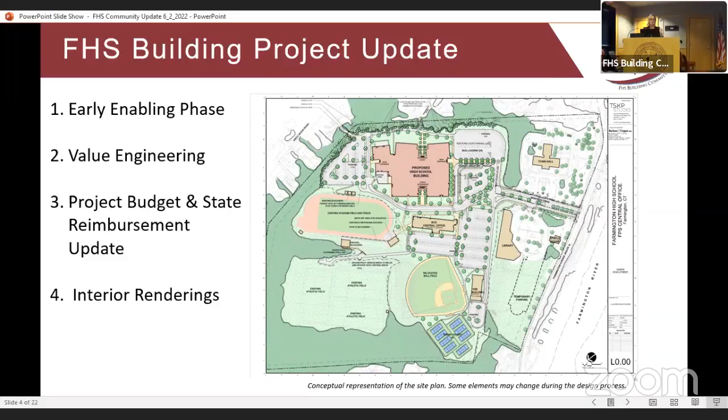One thing we want to talk about more is the early enabling phase. Hopefully you can see the schematic up there. As a building committee, we discussed how best to sequence pieces of this project to help our overall timeline for completion, as well as how we can assist the district in transitioning smoothly from school ending into construction. We also talked about gaining efficiency by removing some of the implications of having students on site during pre-construction work.

So the solution brought forward to us was an early enabling phase, which allows us to do preliminary site work, install construction fencing for safety and security, and build a temporary parking lot earlier in the process. That process, as of right now in our conversations, will begin July 11th, 2022. So students will have already finished school for the year when we start this enabling or construction prep, so that we're ready and prepared for construction to begin more towards the end of October.

It really gains efficiency by not having the kids actually in the school and on site while we're doing some of this work, allowing us to get a good handle on traffic patterns and make sure we can do good communication efforts around that. It helps us really understand and protect our students, making sure it's a safe environment, and getting a lot of that work done so it's all in place by the time they come back to school at the end of August.

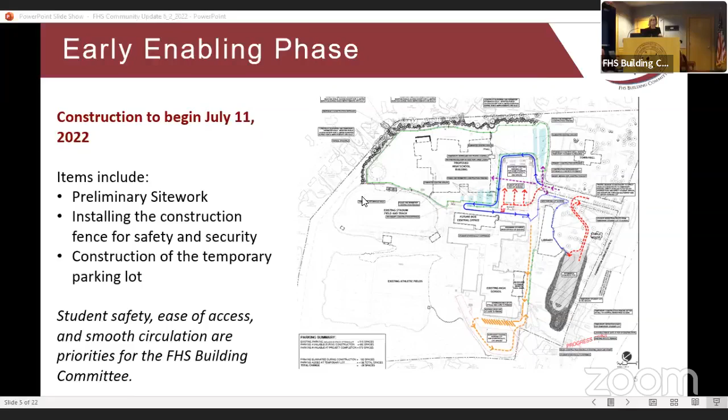So I'm going to turn this over to Kat now that we've done a high level overview, and she can go over some of the value engineering and budget information.

Hi everyone. So throughout each phase of the building project, we've now gone through schematic design, enhanced schematic design, design development, and we're now finishing up construction documents. The professional partnership team conducts cost estimates based on current market conditions. If the construction estimates come in over budget, which they have, the building committee completes value engineering, or VE, to bring the cost back to the original budget. Please note that value engineering is a standard practice in building projects, both large and small, so this is nothing new or specific to our building project.

The process involves the professional partnership team meeting with the design working group to identify line items in the project that can, one, be removed from the scope of the project, or two, included as add alternates in the event that bidding prices are favorable and items can be added back into the project. We've identified a number of alternates that we'd like to prioritize and add back into the project if bidding is favorable. When approving VE items, and Meg just alluded to this, our main priority is not to impact educational programming.

The building committee reviews the VE list created and then approves them at the building committee meetings. Our last round of VE was approved after the design development phase, on May 11th, and the updated cost estimate for construction costs was $361,000 below the original budget.

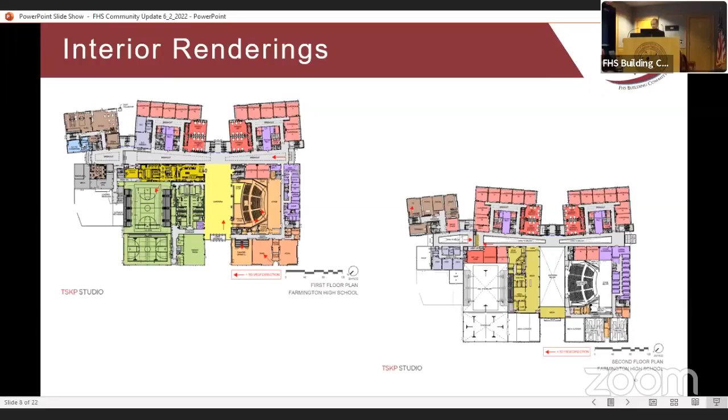There's a large hallway or main street that welcomes all students and provides access to all parts of the building, a very different design than we currently have. At the bottom of the left-hand side diagram is the after-hours access, which is really for community access, very close to the gymnasiums, the auditorium, and the black box theater.

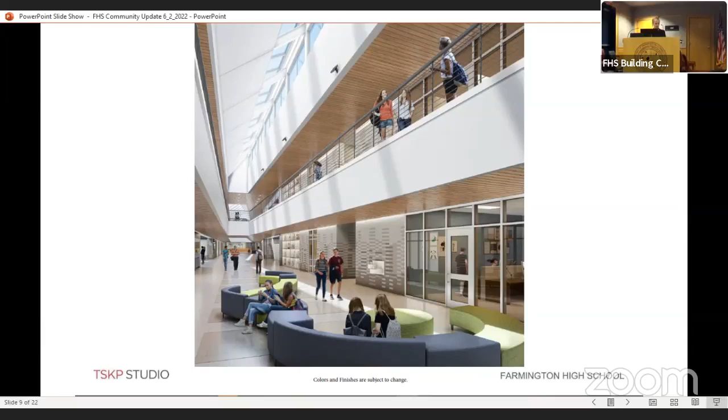If you have a high school student, you know about our Aspire and Capstone project, a mastery-based project usually at the end of a high school student's career, and it's a mandate for our graduation requirement. This will be a space where potentially some of those projects could be displayed or presented to others, and teachers can bring students out to this space as an alternate to the classroom learning environment.

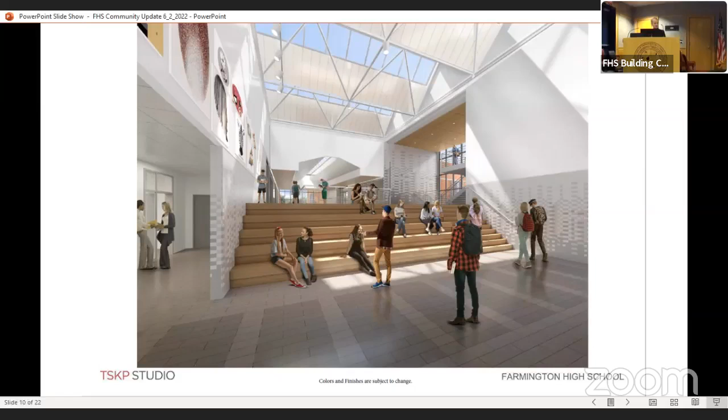So whether it's in classrooms, outside in the hallway, or our cafeteria, you're going to see a lot of display areas so we can really feature those projects, both within our own school community and the larger community.

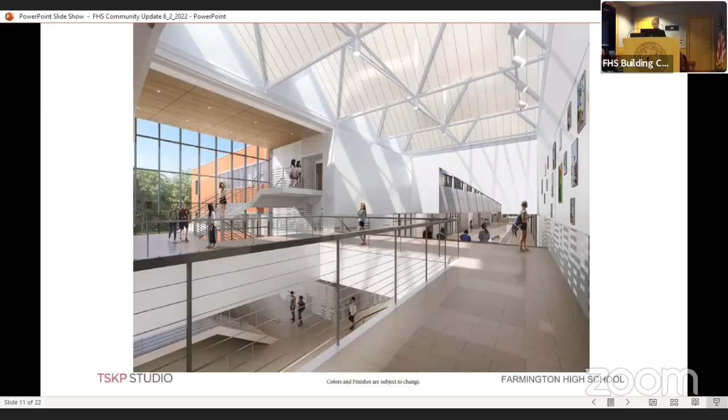Right now our auditorium isn't really utilized a lot by the community, and I think we'll have many more requests to utilize the Black Box Theater and our auditorium. So this building really is exciting, not only for our students, but for the whole community.

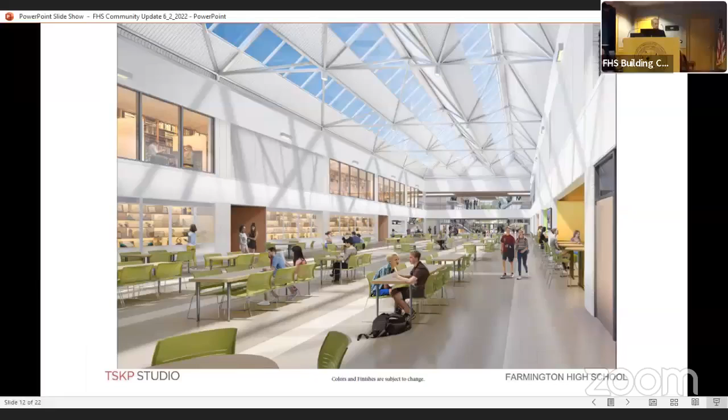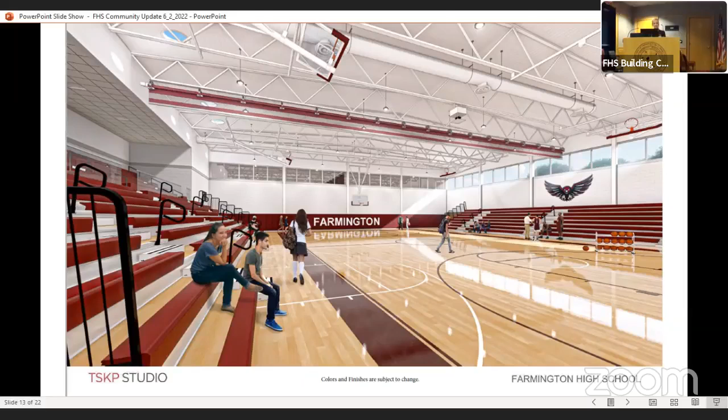This is a rendering of the FHS gymnasium, one of them — we have two. Just like our current building, there are two gymnasiums to accommodate during the day and after school athletic, physical education, and health and wellness programming. You can see our new Riverhawks mascot logo, and this looks more like a gymnasium at a university level. This space allows us to host statewide championships, so we're really excited about having that opportunity at home within our own school instead of going to other schools to do that.

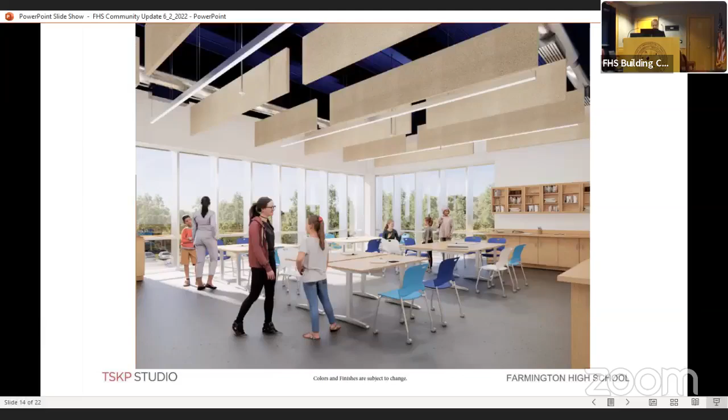Here is an example of an orchestra classroom that is fully accessible. Right now we have tiers and it is not fully accessible, and it has state-of-the-art acoustic treatments. So this will be a welcoming space for all learners.

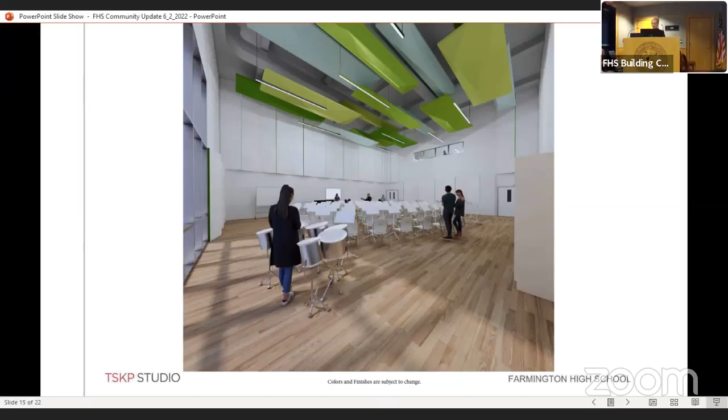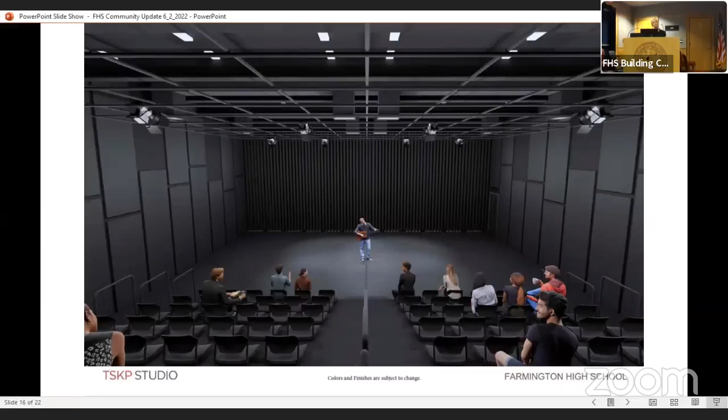The next two slides feature a new program space, which is the Black Box Theater for drama, lectures, and exhibitions of learning. It's a very flexible space. The seating can be moved, so we can use this both during the day for academic programming, but also have events at night here that will benefit our students as well as the entire community. The shades are movable, and so it will reveal light, bringing the outside into the Black Box Theater.

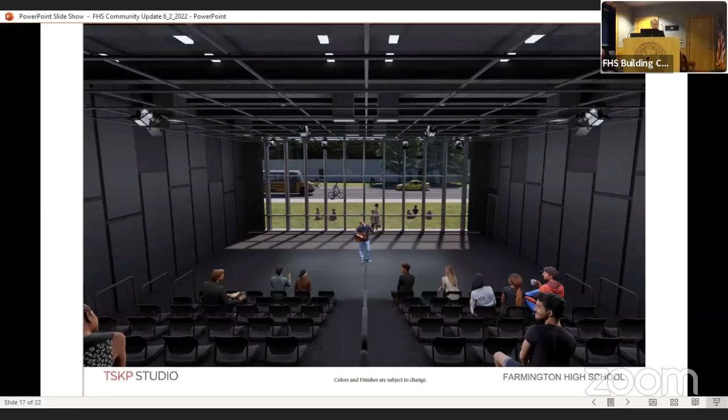The next two slides show our new auditorium, which is fully accessible with state-of-the-art acoustics. Here's a different view on the next slide, so you're really looking down onto the stage. Again, this is another community space that can be used after hours. We really look forward to showcasing learning and performances within this space, across subject areas. We have an exciting music program here in Farmington, and I know that this space is something that students look forward to, because right now the acoustics in our current space is not conducive to performances, and this will be.

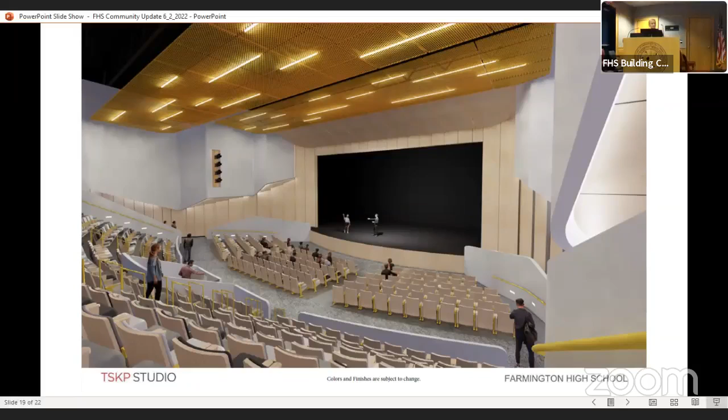So that is an overview of the interior renderings. I know when I first viewed this, I was so excited. I know that Dr. Hurwitz just reviewed some of this with students, so there's an excitement at FHS and IAR because the students coming up also really can't wait for the new building to open. So I will end there and we'll just open it up to any other questions.

Thank you, Superintendent Greider, and really thanks to the committee and the town staff. This is really great, helpful. Can you dive in quick on the special education space and how that compares to today's current building space?

Yes, so we're very proud of our special education programming. We have many more programs here in Farmington than most districts. We do try to prioritize having our students engage in learning within our buildings so they can fully access all the programming that we have. So we built several specialized programs and our educational specifications are specific to the programs that we have. So we're going to have now even better space for those programs that really reflect what's needed, and again, that is flexible space.

I think when you look at this building and the classrooms, because the classrooms are so flexible, we can easily move programs around as well. But nothing has changed, nothing's been reduced as far as special education programming.

And I will just reiterate what Kat said. I really am very appreciative of the high school building committee because they have prioritized not affecting programs. This is a building that will be here for decades and will educate generations of students. We want to make sure that the building is large enough and is able to really quickly adapt to changes in enrollment, changes in programming that we will have for the future.